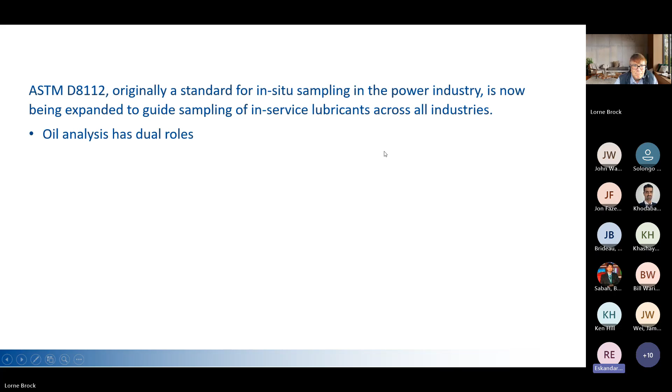Oil analysis, as we must remember, has a dual role. What does that mean? Well, the primary objective is to monitor the condition of safety-related, production-critical operating systems. The intent is to identify and track the progression of specific early failure modes in a system. The second primary objective is to monitor the condition of the lubricant. So the first is the equipment, the second is the lubricant. Sometimes that gets kind of clouded over or ignored.

There are two distinct roles that need to be addressed in your sampling and your testing profile. You need to ensure that the physical and chemical properties remain within the limits necessary to provide the design function of the oil itself. And we must remember that lubricants are an integral part of the tribological system. They're just the same as a bearing or a bolt or a cap or any component in a particular piece of equipment. It's just as important. A lubricant may have a shorter life in some cases than some of the components, but it still is integral. Without it, the rest of the operation doesn't happen.

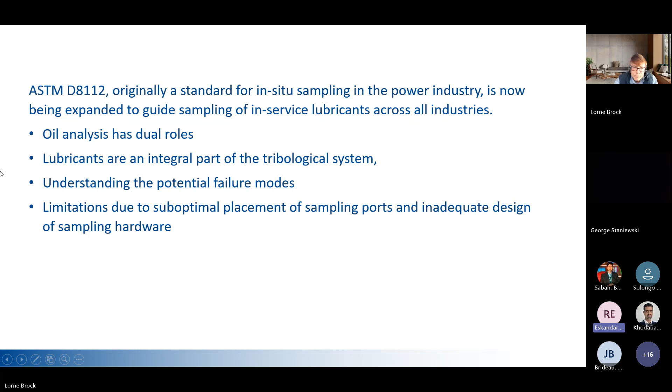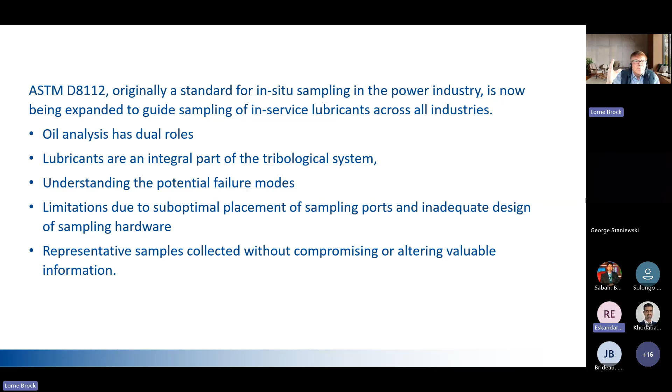And representative sample collection without compromising or altering valuable information is key. If you collect a sample and you didn't do it correctly or didn't take it from the correct spot, it will affect the sample, perhaps negatively, perhaps give an alarm or warning that is not relevant, or perhaps miss an alarm.

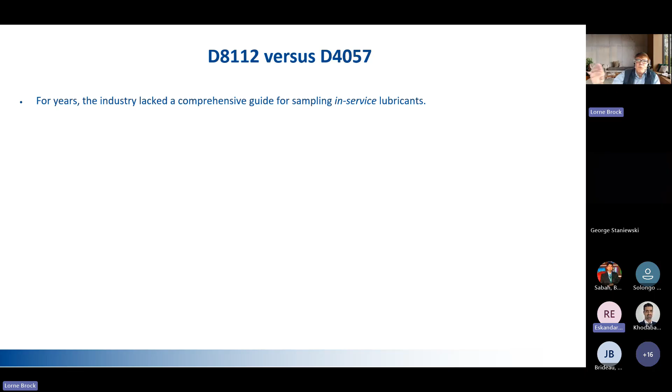At this point, it's key to understand that some people find this very interesting because, well, I follow a procedure. Yeah, okay, you follow a procedure. D8112 versus one other practice in ASTM called D4057. For years, industry has had no standard for in-service sampling, and they have relied on this other sampling procedure, not understanding that it was designed for a different purpose at a different place in time.

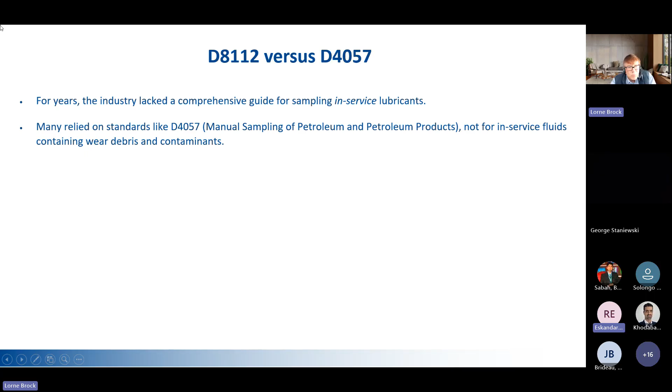4057 is a practice defining the manual sampling of petroleum and petroleum products. It's not designed for in situ, in-service sampling of oil that contains wear debris and contaminants. So right away, I'm starting off short on my practice, my program. I don't have a standard. This gap was identified, I would say, three years ago.

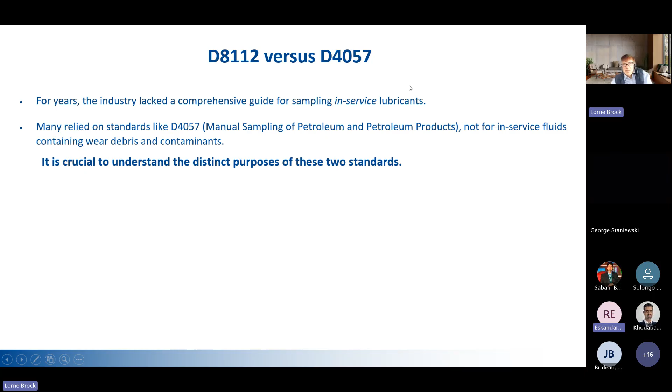It's critical to understand the distinction between the two because there is a message that needs to go out there. D4057 was originally for fresh oil: obtain a representative sample of fresh, unused petroleum products for testing and quality verification during the manufacturing process, during custody transfer. You wanted a homogeneous picture of the material you were looking at, an accurate volume measurement, and the numbers collected on that sample had legal and commercial implications.

But you don't see anywhere here that you're collecting a representative sample for in-service monitoring, condition monitoring. So right away, ASTM D8112 is for in-service oils: obtain a representative sample of an in-service oil. Representative can often have a broad context, and sometimes a misunderstanding. So we're going to talk about that a little bit as we go through.

Also, D8112 had a focus of capturing information on equipment condition and fluid health. Again, something that the 4057 scope was never required to do. They weren't interested in the health or the condition the sample was in. They wanted to know what the sample looked like. Does it meet the requirement or the specification or the standard or the C of A that we've agreed to?

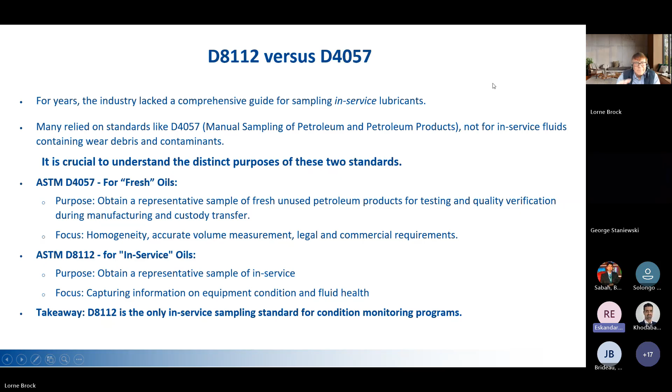Before we go much further into this, I'd like to explain a bit more about ASTM and give some insight, because that's key in what we're going to talk about in a few slides about this particular standard guide. ASTM has near 12,000, it may be 13,000 at this point, ASTM standards, and they operate globally.

I will say this, the name ASTM might have a reader thinking, oh, this is an American standard. Well, that's where it started. Like ISO, ASTM standards work in concert. They are global standards, providing standards for over 150 nations, and they use the expertise of 30,000 members worldwide. So you can see it's not just the United States or America.

And it ensures safety, quality, and reliability, constantly responding to new challenges. And that's where we are right now, a new challenge. We're not necessarily the new technology, although some of that is being brought into this particular guide. And it's not a new market. It's actually expanding the market from a very narrow focus to a much broader use. It builds on the principle of voluntary consensus.

So no one's forced to be here. No one has a mandate to be there, and it gives everyone an opportunity to participate equally. We'll explain how that happens. You're saying, oh, really? No, it's not done for any particular manufacturer or any particular producer. In fact, the system is set up to prevent a bias or undue control by that, which one might expect.

Sometimes we'll find that a particular ASTM standard is actually incorporated, written into a contract, a regulation, a code, a law. So around the world, it has very important and broad implications. ASTM publishes the standards. They are the keeper of the standard. They're the keeper also of the process. All stakeholders are involved. A neutral forum, key, remember that, neutral forum, public and private sector cooperation.

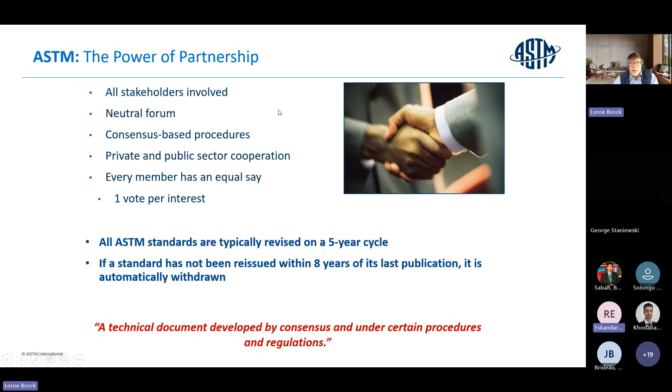Several members come from areas that aren't even necessarily related in the end. Every member has an equal say. It's true. One vote, one interest, one person. All standards are typically revised on a 5-year cycle. If they're not revised by 8 years, it's withdrawn until a new process is put in place to reinstitute or to reissue a standard to fill that gap. A technical document developed by consensus under certain procedures and regulations is really what we're talking about.

This is a graphic of how an ASTM standard gets created. Number one, someone recognizes a need. We've recognized a need here in the case of D8112 that there was no standard or guide to cover in situ sampling of in-service lubricating fluids. So once that's identified, it's fed into the ASTM process, and a task group convenes the key stakeholders. A task group would be called a working group. And we have a working group, and I'll show that in a few moments, with 20 members at this point in time. We're happy to make that more, and we'll talk about why.

Then the subcommittee. In ASTM, there are different subcommittees that have different responsibilities for different standards and guides. And there's the main committee. D02 is on petroleum and lubricating products. That's the one we're under right now. Then they have subcommittees, and those subcommittees will have experts in certain areas. And below that would be a task group that's formed that has an interest to develop a standard to fill a gap.

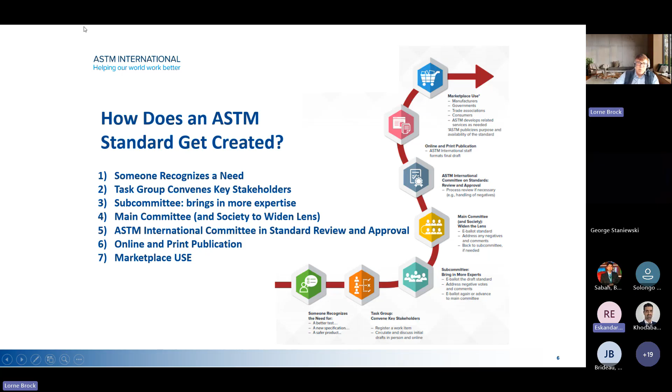ASTM International Committee is a standard review and approval process. Once it's completed, it is then published either online or in print. And that's the user. The end user is the marketplace. So each ASTM standard is given a unique number. In this particular case, it's 8112. So that is a unique number. And then it's grouped into one of 6 categories that identify the type of standard.

There's a standard practice. A practice is a prescriptive instruction on how to do something. Do it this way, with this piece of equipment. A guide is what we're talking about here; it gives options and lets you pick the option in a process that meets the particular industry. And you can see when you're doing sampling, you might be in a paper machine, you might be in a power plant, you might be in a mine, you could be in many different circumstances. So you have to give options, and we'll find that as we go through D8112.

Then there's a standard test method. This is how you're going to do it, if you're going to claim that this is the result that you got and its validity. There are classifications of types of standards. One that probably holds an awful lot of legal weight is a specification. A specification is, this is what you do, this is the result, and that is valid legally. And then another one is called terminology. It's a collection of all the terminology used throughout various standards. It's the go-to point to find out what we mean when we say in situ in this particular case.

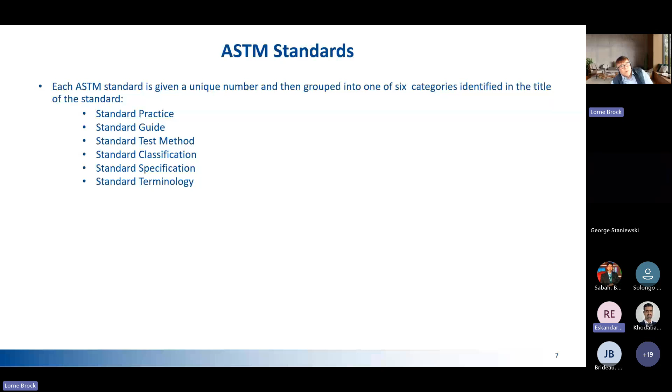So standard guide, that's what we're talking about here. ASTM standard guide, D8112. They're a guideline. It's a collection of information or a list of options, as I said, of varying instructions without specific recommendations saying this one's better than that one, because you have to look at the application. But these are the possible options, and here's their benefits, here's their shortcomings. Decide which one fits best in your application.

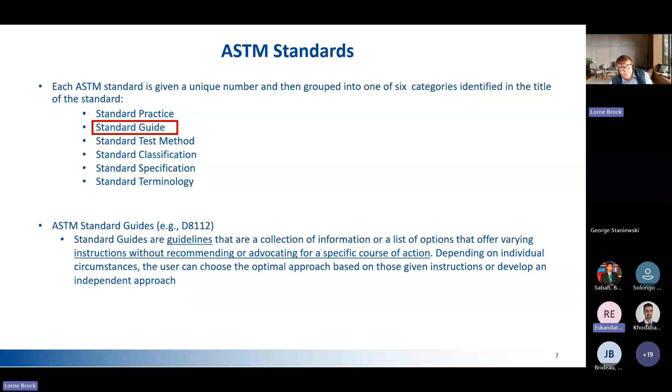The ASTM process. The ASTM standard process is designed to provide open, and I think I've hinted on this, but I'm going to nail it down here: open, unbiased, and balanced outcomes. Subcommittee memberships have to be a balance. They have to have users and general interest individuals, and that number has to be greater than the producer members.

So they keep track of where membership is coming from and what the status of individual members is. And that can change depending on a particular strength of one of the members. In one guide or standard, they may be only general interest. In another, they might actually be the producer of a certain test or a certain product.

Anyone can participate in the subcommittee meetings and submit comments on the ballots. Anyone. You don't have to be a member of ASTM. Non-member comments before the balloting process and the tabulation of a ballot are treated exactly the same. If someone says certain things should be considered or a certain thing is overkill, then that's taken in, is examined, and a change will be made or a comment noted.

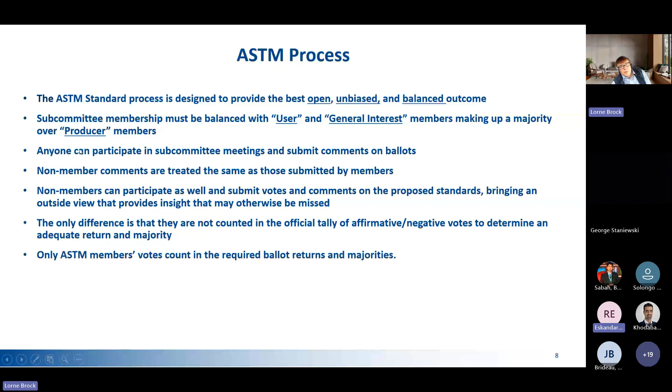Non-members can participate. They can submit ballots, votes, and propose the standards. They bring an outside view. Oftentimes they catch things that otherwise are missed by those that are particularly technical focused long term. The only difference is they're not counted in the official tally. You have to have a certain number of affirmatives, and if there's a negative vote from a member, you have to respond to it in a certain way, and you have to present that. But the information itself is still as valid. Only ASTM members' votes count in the required ballot returns and majorities.

Now, when we're looking at this process, I said we have a subcommittee or we have a task force, and that is a collaborative team. In this case, the standard is D8112-22. I think I have a slide in here where I said 24. I think I was wishfully thinking that this one would be upgraded by then. Usually the dash and the number after that indicates the year that it was actually approved. The standard guide for obtaining in-service samples of turbine operation related lubricating fluids. That's D8112-22.

The collaborative team, in this case, is WK88872. It's made up of 20 representatives and stakeholders. We have ASTM and ISO committee members, technical experts, manufacturers of aircraft and space systems, one particular individual from Boeing, microbial contamination control services, BCA Inc., fluid experts from North America and Europe, myself. I happen to be the lead of this particular working collaboration team. There's Dr. George Staniewski, he has his corporation. Ken Brown of Utility Services Associates, another colleague of ours here in the Toronto section, STLE.

Fluid monitoring equipment and components. You got HYDAC. We have JM Canty, two individuals from there. They have equipment for monitoring, measuring, and providing components to that section of the industry. Fluid maintenance, contamination control, and testing equipment. We're looking at manufacturers of test equipment like Ametek, Spectro Scientific, or Fluid Tech International, or Trico Corporation, who make automatic oilers as well as testing equipment and procedures.

We have lubricant analysis, testing, and certification members. We have EPT Cleanoil. Gavin Pereira of Kinetrix, another member of the Toronto section, and here we're in Toronto. We have Polaris Labs. We have SGS North America and WearCheck Canada. Bill Fennell working with Hamilton section and Toronto section. Again, you're seeing that there's a number of key members from STLE Canada and more specifically Toronto section.

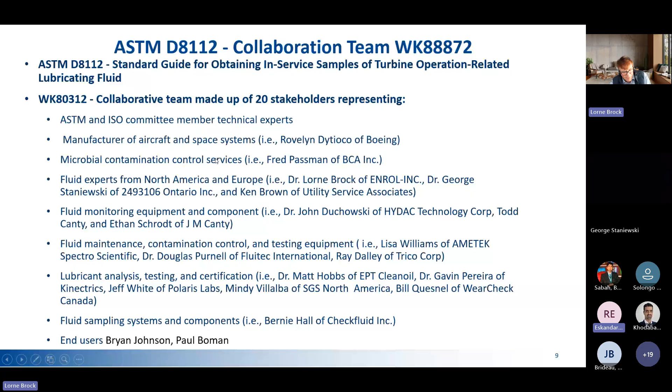There's 20 members. We're happy to make that 21 or 30 or 40 if you have any interest in this, or even a curiosity. We're happy to include you in examination of the draft and where it should go, or what is in there now. We're going to talk a little bit from a higher level. I'm not going to be specific because we only have an hour or less, but we're going to go over the highlights.

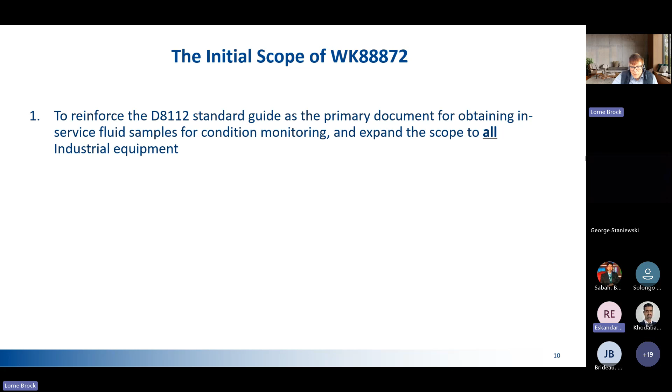Initial scope, back three years ago, or two and a half years ago, the scope was identified because we had a gap in industry, because the standard was limited to power. Therefore, to reinforce this, we needed a primary document for in-service fluid for condition monitoring, expanded in scope to all industrial equipment. It's key that, okay, there's the gap. It's in the scope. We're at least headed in the right direction.

Then to differentiate, because not everyone, just like I introduced in one of the first slides, there is D4057. Many individuals look at that and say, this is how we sample. They weren't aware that this is not what the scope of 4057 was. So D8112 has to differentiate itself, has to highlight that it has a strength in this particular area for samples of in-service lubricants. It has to reflect the broader scope of a guide, indicating that there are options. There's more than one way.

As I said, no longer do you need a drain plug that's just a plug screwed into a threaded opening. You can actually put a sampling port or sampling device there and collect more valuable information. And therefore, the title should be modified. Initially, the title is specific to the power industry and ancillary equipment. And you need to expand the sampling process to include examples of a variety of industrial equipment in a broad spectrum of types of industry and systems.

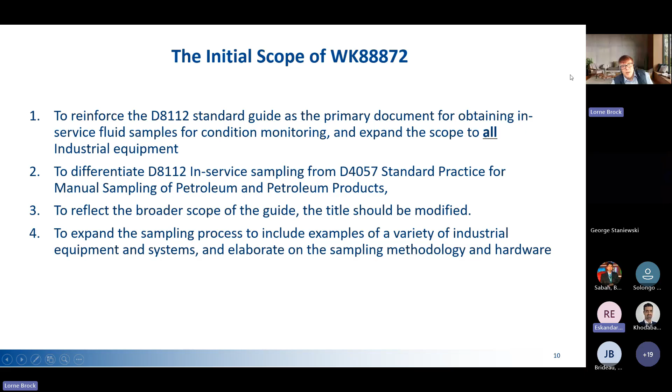And we need to elaborate on the sampling methodology, where the shortcomings are, where the strengths are, why you would or wouldn't use a specific methodology in a particular application. So what's the evolution? You now know the standard. You now understand what the scope was. This standard is currently known as ASTM D8112-24, Standard Guide for Obtaining an In-Service Sample of Turbine Operation-Related Lubricating Fluid.

As you can see, as I said, it's too narrow. It's not aligning with what this standard can do. And the standard has a lot of information already in it. As I said, Bernie Hall and George Staniewski worked very hard along with their collaboration team, it's not two individuals, to collect key information that fit the criteria identified here. A strategic move has already been made in this process.

The standard was transitioned from Committee D02.C1 turbine oils, which was very narrow. And that subcommittee is responsible for only turbine oils and power-related equipment. So it was recognized, yes, it's true, we have to move it to something that's more relevant to the in-service oil application. So D02.96.04 is a subcommittee that handles guidelines for in-service lubricant analysis. So that's the analysis side. It's in service, so we're in the right area.

And we've now broadened the scope. And that was actually voted on last year, and it was recognized and it was passed. So the first step has happened. The standard is where it should be. A new vision was to establish D8112 as the primary universal document for obtaining in-service fluid samples for condition monitoring across all industrial applications. And that's really where we stand today. We're developing a draft, and we're going to pass that draft through the various processes, committees, and groups within ASTM, as I've identified earlier.

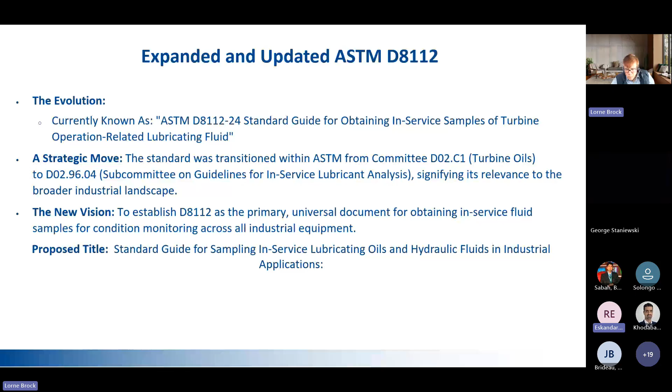We have a proposed title, but again, this will have to be passed. Just because I say it, or George or Ken or anyone else says this title is the right one, it has to be voted that it actually is meaningful, that it captures the essence. So we're proposing Standard Guide for Sampling In-Service Lubricating Oils and Hydraulic Fluids in Industrial Applications. Right away, it's not so narrow. But again, if the working group gets together and somebody says, I think it should be expanded or adjusted,

we will look at that. Once that draft has been collected and we think we have the right draft, we will pass it back to the subcommittee and they will ballot. So the 20 or 30 members or so of the collaboration team have to have a consensus that we're ready, this draft is ready to go through the process, and we believe it has a chance of passing. You're not going to pass something through all this work until it's ready.

After thoroughly reviewing and updating all items in the draft, we then agree on the collaboration team, design the standard itself, and then send it in. So this gives relative numbers. So 20 or 30 people, whatever the collaboration team is, agree, okay, we're ready. Then it's sent to the subcommittee. That's D02.96.04, which is the new home. And they will do that.

Our timeline is the spring of 2026. So it will go to the subcommittee, and then the subcommittee will vote. That typically could be up to 278, because that's the relative membership of the subcommittee. And they will vote. You can see it's getting slightly harder.

There's more people looking at it, and if it passes that ballot, then it goes as the draft to the D02, that's the main committee. The main committee looks at it, and they would either pass, give an affirmative, or they might send it back with a negative saying this area needs to be adjusted. We want to look at things carefully and see if they're valid comments, and you have to give reason why you accept or don't accept somebody's negative vote. Then you go back through the system again.

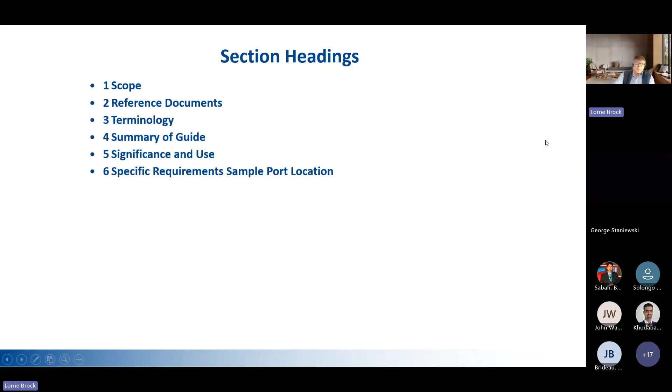Talk about the significance and use of the standard. Then we talk about specific requirements of sample port locations, kind of an explanation of where this should be and why it should be there. And then I elaborate on section 7, sample collection hardware requirements - this is the material that's going to be used in the sample collection from a hardware perspective and supplied by someone. Sample bottles, what kind of sample bottles in a broad sense, because section 8 actually gets into specifics.

Identification of sample ports and tagging, what's required, what's recommended. Permanent sample tubes, as opposed to a flexible hose that you put into an orifice and you don't know where it's really going. You identify where you want that sample to be taken from, and then you put a permanent tube in place so you get consistency.

Non-pressurized reservoir - oh, we have non-pressurized. We also have pressurized. And we look at options to retrofit. Not everyone can start from scratch and go back to the drawing board overall, there are retrofit modules or modifications available in the marketplace. We identify some of them in here. Some of them replace a sight glass or a drain, others retrofit in through a breather or a vent.

Bulk tanks - the bulk category is both totes and drums. Drums far surpass the tote, but there are some processes that need to be in place to understand how to sample those reliably and correctly. And then we talk about pressurized system sampling ports and the requirements behind that.

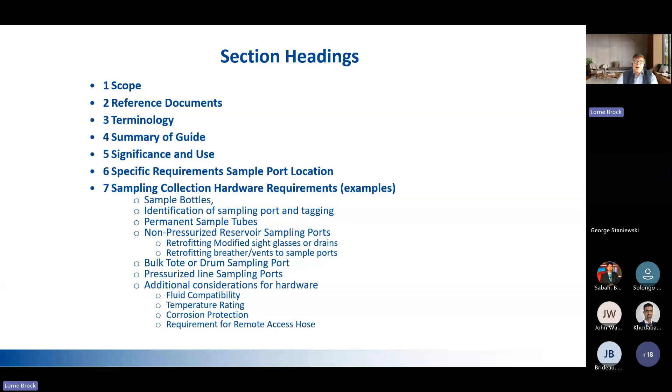And then there's some other considerations that we need to have in the back of our mind while we're doing this. Fluid compatibility - you don't want to have seals and components of these pieces of hardware or the sample bottle that are dissolved or not compatible. And what the temperature rating is, because not all samples are at room temperature. Corrosion protection and requirements for remote access hose - you don't just grab any old hose off. Well, maybe we do, maybe we have done that, but the direction is not to just grab any old hose to extend the sampling port.

Section 8, as I already alluded, is sample bottles. We get into more details on the sample bottles, and this includes things like vacuum sample bottles. What does that mean? I'll show you a bit as we go forward, but a bottle that already has a vacuum, so when you plug it into the sampling port, it withdraws that sample. You don't have to pump it into the bottle.

So you eliminate some of the errors or contaminations or effects of vacuum sampling. Still key, still important, it's included in here - the next item, vacuum generating device, vacuum pump, vacuum sample thief. And then there's continuous loop sampling, where you have a bypass continuous loop. Section 9 is sampling procedures - some examples, sampling from non-pressurized sample ports using that hand-operated vacuum pump or that vacuum sampling bottle. And then again, from a pressurized system, you don't have issues with drawing a sample because there's already pressure in place, but you need to contain that pressure. You need to still manage the amount of purge required before you call it a representative sample, things like that.

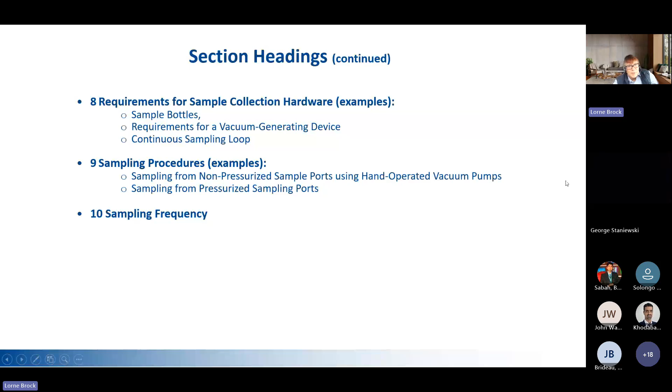And then the frequency: how often should you be taking samples to meet your goal or objective? That's identified and elaborated within the standard, when we talk about elaboration, sampling method and hardware.

It's very specific, not just following the same old procedure you have. It may be good, it may be the right procedure, but you need to examine it, look at other possible methodologies and say, oh, there's better opportunity, or we're just fine.

The standard provides extensive practical detail to ensure that the sample is representative. Critical methodology enhancements, sampling ports, the location for the best place in the system or the closest place, because it's not always possible to put it in exactly the right spot, but at least it tells you where it should be, and then you look for the opportunity, the option.

And sometimes you analyze the system - you're going to be building a new piece of equipment - you get the opportunity to build that as a design into the design function or the design of manufacture.

We identify in the standard between primary, which is the place you take your routine sample all the time for overall; secondary, where you want specific information on a particular part or area of the lubricant system; and then you have the tertiary. Those points are there only when you're really into troubleshooting. You won't use those routinely because usually there's a lot more samples. As you go from primary to secondary, you increase the number of samples, and to tertiary even more so.

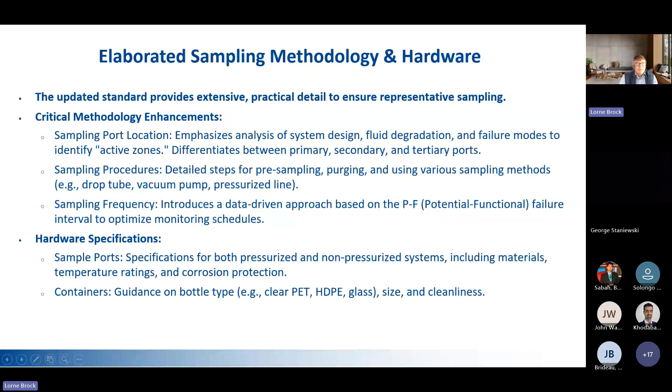Non-pressurized systems, including materials, temperatures, rating, corrosion - I mentioned those before. The containers, there's guidance on bottles and the particular - where does PET work, or a high density polyethylene or glass bottle?

What are the shortcomings? What are the advantages? How big should the bottle be, and what cleanliness can you expect if you're doing cleanliness, ISO cleanliness count? And then what accessories are available?

Covers for the vacuum pump, so that in a dirty, dusty environment, you don't have the pump and the sample bottle, and you're already causing contamination that is not relevant or not representative of really what you want to gather.

Or disposable tubing - notice the word disposable here. Many think that quarter inch tubing in a vacuum pump can be used on and on and on, but by doing that, you are really masking or causing errors in your end result. And there are specialized probes that can handle pressure, temperature, dirt, and that's really where you want to go.

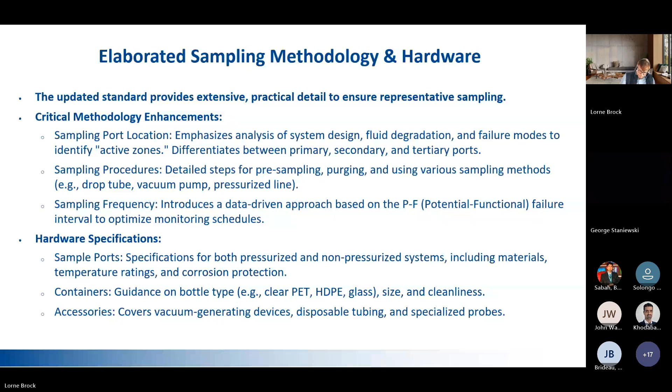The next few slides are going to highlight and show images that have actually been created or are being used in this standard to help guide you to find the specific spot, whether it be the recommended primary location, secondary location. If it's a non-pressurized loop point compared to a pressurized one, then you know which pieces of hardware you're going to need.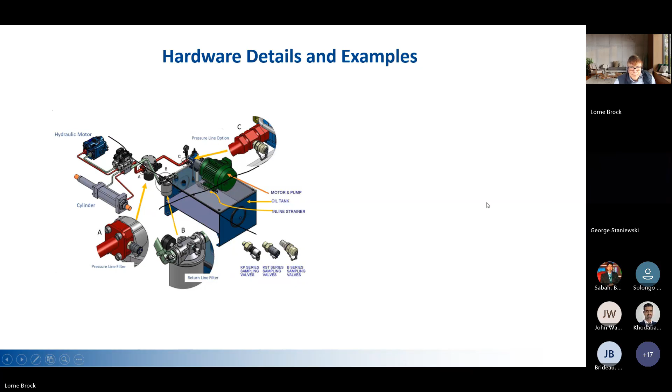Then there are other images included here. This one was developed and shows a return line coming back to a reservoir. This pipe, this line actually captures samples on the return side. It's not just a random sample from the reservoir, so it's going to have more relevant information.

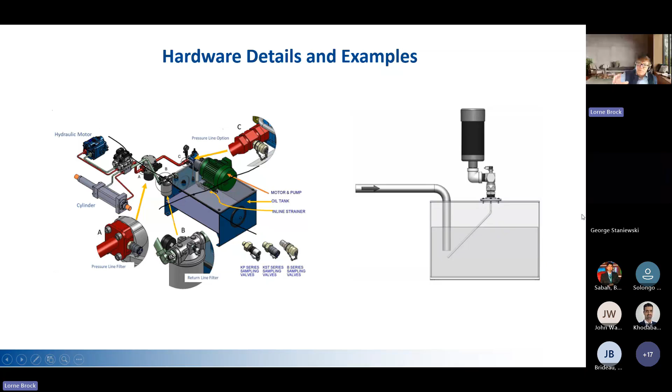What have they done here? They've taken a vent, they still have the vent, a desiccant filter and vent here, but this vent has had a new attachment that included a permanent specific tube for capturing, as well as a sampling port on the top, one that doesn't affect or isn't affected by the breather function. The images are there to show that.

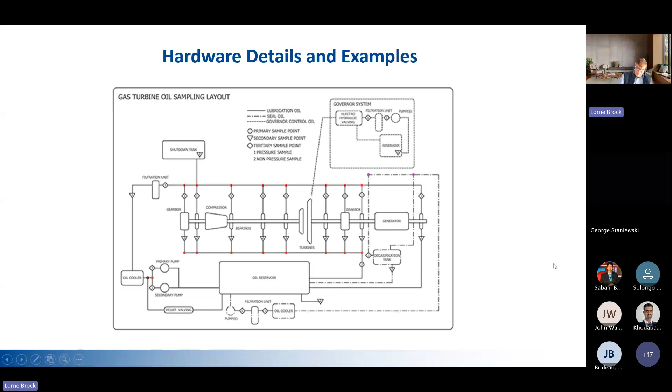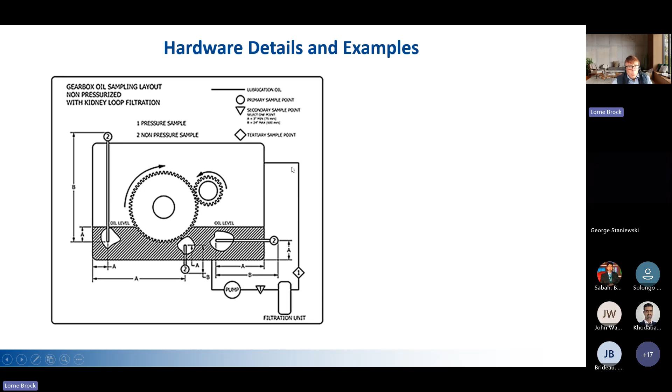There's other places to collect samples, maybe not quite as much information, but you could collect a sample as shown here on the far left. See, we've got 1, 2, 3 places that you could collect samples in here, whether it's bypass or in system, and whether it's pressurized or non-pressurized is identified in the circle.

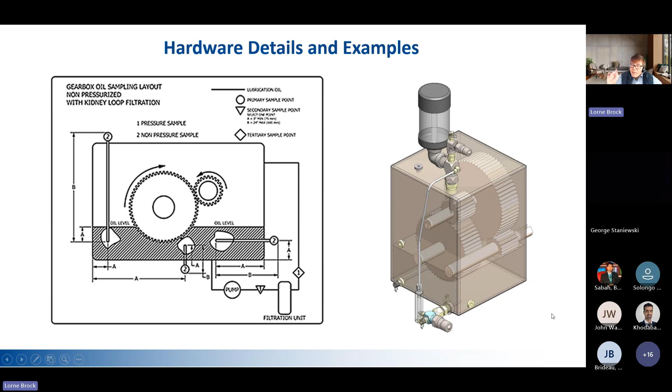That's one example. Other new images have been put in here, ghost images showing a collection, a sampling port built into the top of this particular vent, just like I showed on the other one. Here's the breather, the filter on the breather. Here's the sampling port at the top. Here's a quick connect, this can actually function as a place where an addition of a kidney loop can be added. This tube here keeps equal pressure, both on the venting side and on the bottom intake. But these are in there, explained in more detail than we got time for here.

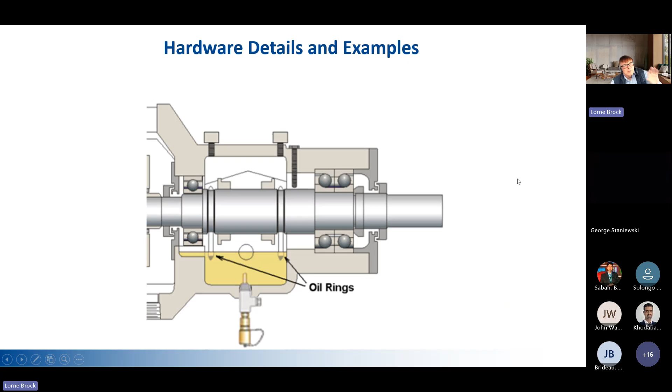Also shows us that if we're collecting samples from this location, we're not getting a lot of information from the rolling element bearings themselves, even though they're lubricated with this oil. And yes, some wear metals and things of that nature do return to this sump, but when the ring is splashing the oil in this housing, it's not being specific. So if you need something more specific, it tells you that you're going to get a generic view of that particular application.

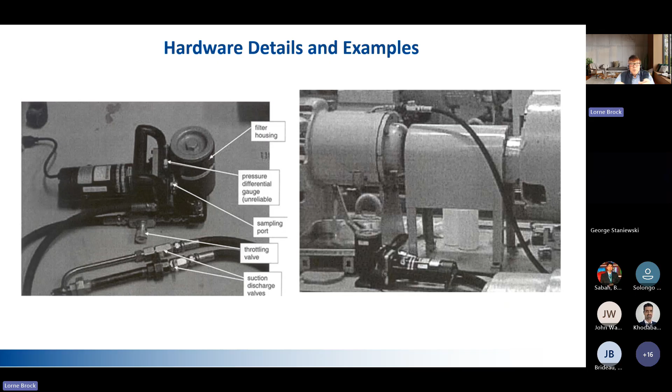Other ones, in situ bypass filtration and the opportunities included there with these portable filter pumps, where they should be connected, that's included. Some images like this explain the different parts and how you collect a sample while doing this bypass. Another important piece of information.

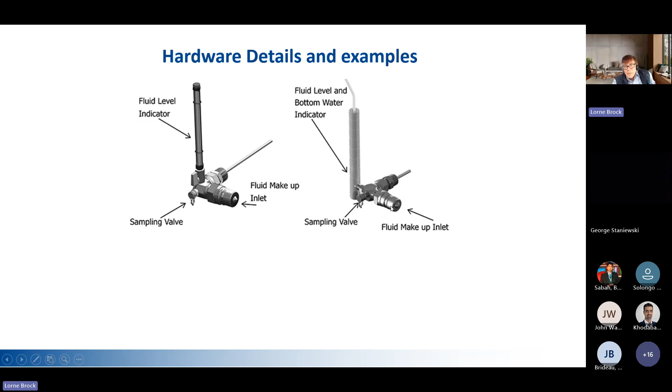There's some, I talked about some of these multi-port replacements for sight glasses and for vents and for just threaded ports on most systems, getting opportunities. You see this sample, this permanent sampling tube on the one side. We have fluid level indicators, and we have a place for adding makeup oil or putting bypass filtration in place.

And there are images shown in here of real industrial applications. And then there's others showing more modern ones. They have these Lunettes. Well, Lunette is one brand, I'm sorry. There are multiple options, many other companies. So instead of just a flat bullseye sight glass that many of us are aware of, we have a sample port that can be visible from multi angles.

It has the capability for sample taken from the top, and this sample port at the top is connected to a permanent sample tube that either collects from in stream in a pitot tube way, or it collects from a particular return spot, depending on where this is placed. This also has a corrosion indicator built in, possibly, and they have a magnet, so you can actually visualize ferrous materials being collected, as well as the sight glass function that it had in the past.

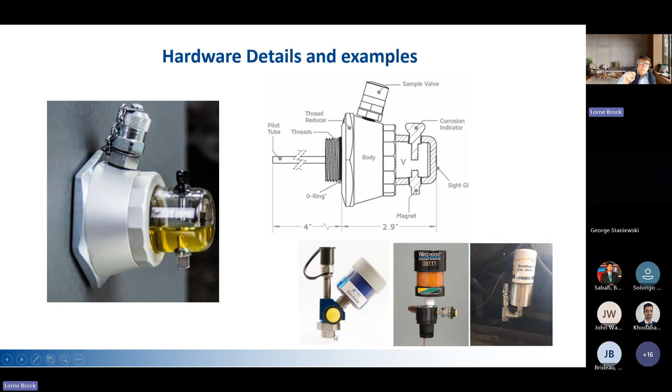And you can do the same thing with the multi-port for vents and breathers. We have a sampling port, we have a breather. These are three different companies, three different examples. We can see on the backside, there's also a specific permanent sampling tube being attached, and you can collect those samples.

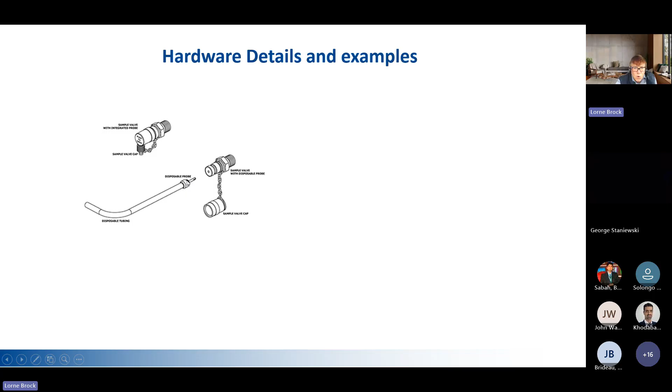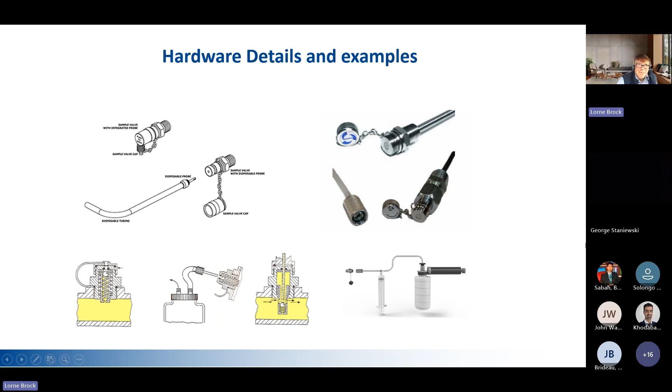In the standard, it also provides examples. Okay, how do we collect it with, say, the probe and sample valve, and what that looks like. Some of the options are available. Here's non-pressure and pressurized. And it has more schematic images showing how that works. Then we have three-way collection for dissolved gas. That's done and explained. The vacuum pump we're familiar with.

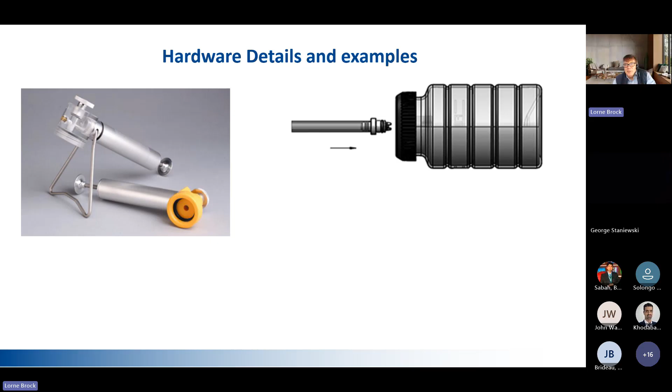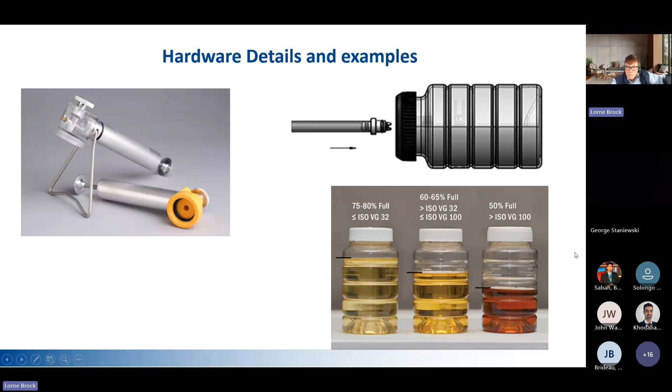Here's an example on the top right showing a vacuum sample bottle. You would take your tube, you would have your probe on the other end, and then you have this special fitting. You plug it into the bottle. There's reduced opportunity for contamination, but that bottle will actually withdraw the lubricant in seconds. Now we have how much lubricant you need. It's defined in here depending on viscosity grade and what you're trying to do in the sample. And this is using modern technology. We now use QR codes on the sample identification tag.

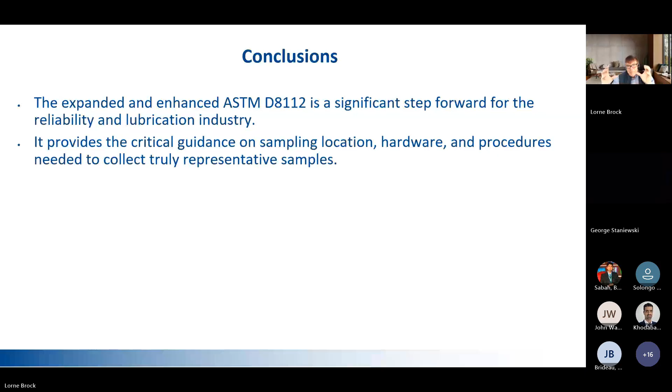So in conclusion, the expanded, enhanced ASTM D8112, hopefully we can have D8112-26, maybe not, or 27, is a significant step forward in reliability in industrial lubrication. It provides critical guidance on sample location, hardware, and procedures needed to collect a truly representative sample. It's helpful to the third-party oil analysis that you've commissioned to look at your samples. They understand how it was collected. The standard was transitioned to the right subcommittee, and the intent is to ballot, as I said, in the spring of 2026.

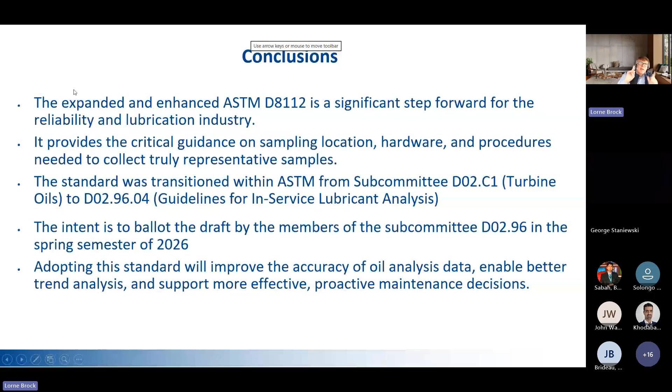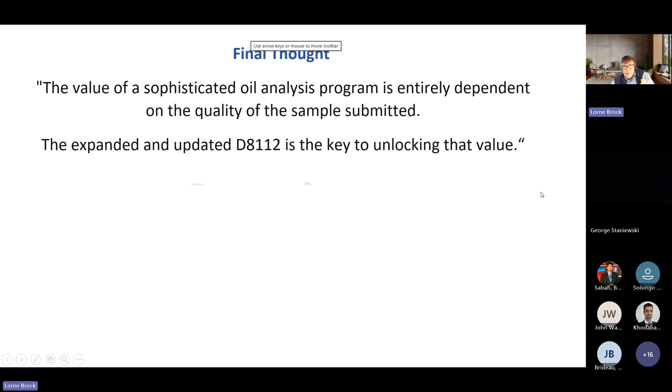Adopting this standard will improve the accuracy of oil analysis data, enable better trend analysis, and support more effective, proactive maintenance decisions. Remember this: the value of a sophisticated oil analysis program is entirely dependent on the quality of the samples submitted. The expanded and updated D8112 is the key to unlocking that value. I'm happy to take any questions anybody has.

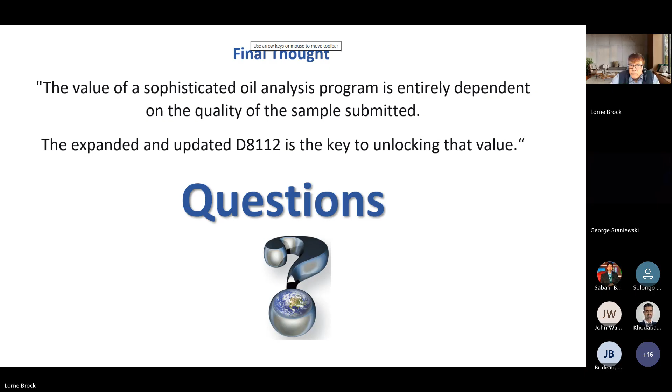Hey, Lorne. It's not a question, just a comment. I'm glad you're presenting this to the STLE in Toronto, and I'm really hoping this does get approved in 2026. This will be a great standard, because this is what we've been teaching our customers and in public courses across North America, and it doesn't line up with the current ASTM methods or body of knowledge. Being on OMA and OMEX committees, it doesn't line up with the questions.

So I'm very excited to see this released and to start writing some questions for the certification exams. That'll be key in rewriting questions and also re-educating. Exactly. This is what people are educating people on, though, so it's really good to see this alignment coming. So I thank you and your group, Lorne. Good. Thanks.

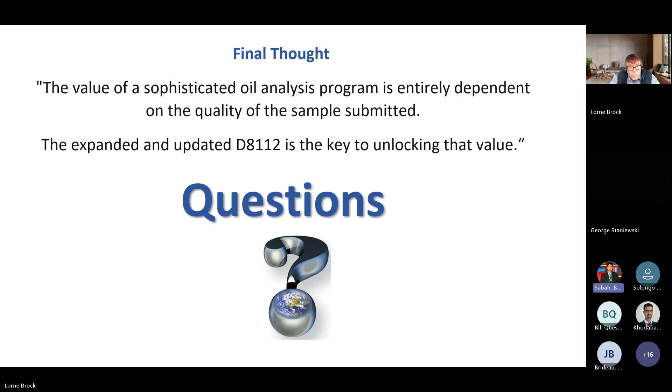Jeremy, are you going to read the questions from the chat, or Payman? Are there really questions in the chat? I don't know if I can read them. I don't know where to look. So go ahead, please. Enlighten me.

We have a couple questions really around the containers, the bottle cleanliness. And then he also asked, per the method, what is the typical contribution of sampling error to the R&R? And what control limits and validation experiments does the standard prescribe? So if you could give us an overview of what's included around the sampling containers, contamination, test error and so on.

Okay, we're going very specific. That is one area that is in here, as I said, and we talk about what is possible when you purchase a sample bottle, and hopefully you purchase them with the caps on and they're in a sealed bag, and that's the way it's taken to the application. So number one, in a specific type of material, glass, you're probably never going to get the cleanliness you expect. You're always going to get contamination.

If you buy of a specific identified cleanliness rating, then you can expect that as long as you follow the process that I just identified. Leave the cap on, leave it in its bag exactly as it came. They're not usually certified; they usually provide a guideline as to the type of cleanliness. Super cleanliness, and it's identified in the standard as to what you can expect, how much contamination might happen. One particle in the whole bottle. That's an exaggeration, but something of that nature is explained in there.